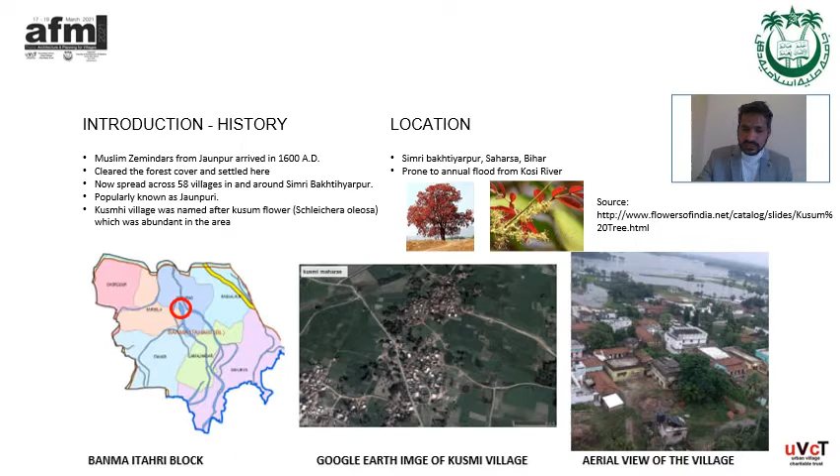This village is divided into three different neighborhoods called mohallas: Kunjada Toli, Kusmi and Charrapatti. Kusmi lies in the center and is populated by the landlords. Kunjada Toli is on the north side, populated by vegetable vendors, workers and laborers. Charrapatti is on the south side and is populated by farmers.

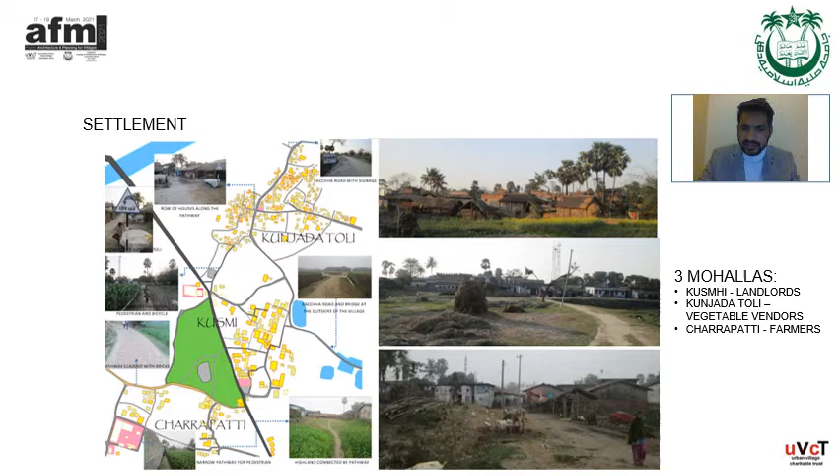In the panoramic view on the right side, you can see densely packed huts, and also palm trees, which are abundant in nature and also used as building material. In Kusmi village there are ponds overlooking the houses, and also a lot of open spaces. In Kunjada Toli, there is a mix of huts and brick-and-mortar houses.

On the main road approaching the village lies the chowk, a marketplace or center point. Here you can see a lot of shops, salons, tea points, a primary or middle school, a mosque, etc. This place is also important as it provides space for social gathering, as well as a lot of political discourse. It also provides access to public transportation.

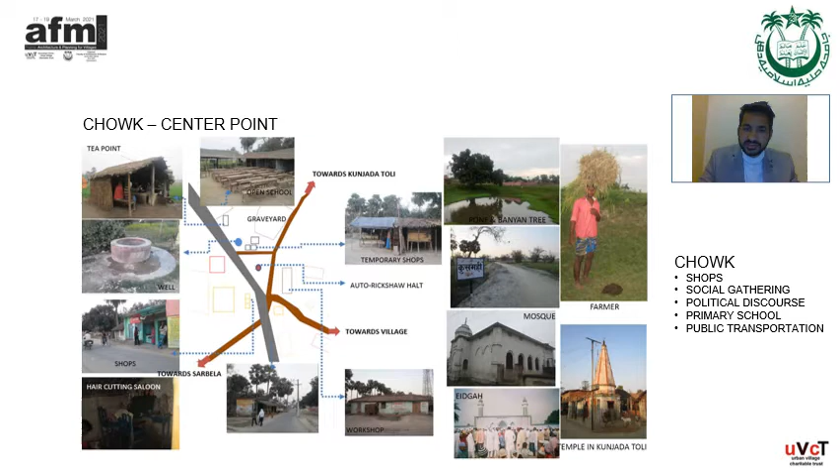Vernacular architecture of the village is inspired by the climatic conditions and local materials available here. There are three different typologies of houses: thatched huts, mud houses and courtyard houses. Thatched huts and mud houses can be seen in Charrapatti and Kunjada Toli, while courtyard houses can be seen in Kusmi.

All the spaces and activities are concentrated around the central courtyard, organized from the most public to the most private space: public, semi-public, semi-private, and finally private. Public spaces have the entrance and a darwaza, which is a guest house used especially by guests as well as male family members. Semi-public space has the courtyard, a gathering place for female members. Semi-private area is the osara and the kitchen. Osara is like a veranda, and private space has the living rooms.

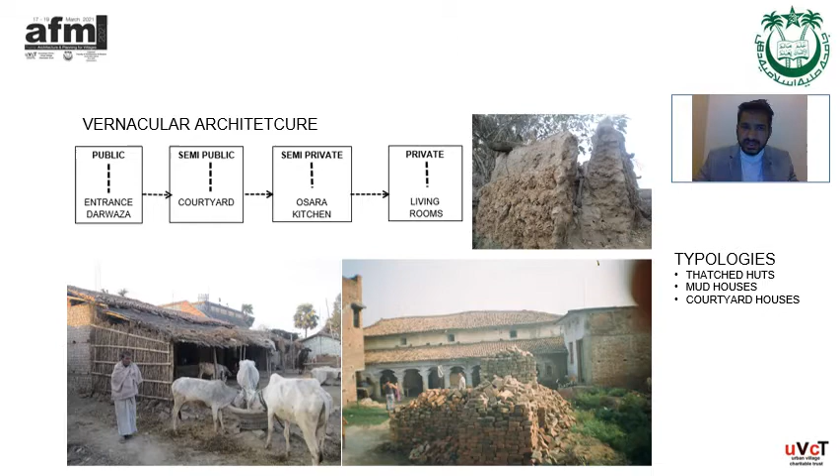Some common features of the vernacular architecture here are courtyards, verandas, high ceilings, attics and sloping roofs. The sloping roof is most common among the three mohallas or typologies because this area receives very heavy rainfall annually.

Building materials used here are mud, bamboo, timber, bricks, pot tiles, palm trunks, etc. Bricks and pot tiles were manufactured locally. Huts were made using thatched roofs and bamboo sticks. Courtyard houses were made using brick walls, plastered with surkhi lime, and mud mortar was used.

These houses had attics, and also ventilators above the veranda. In the roofing system, the palm trunk was used as a horizontal member, and bamboo and wood were used as sloping members to form the structure, with pot tiles laid over the top.

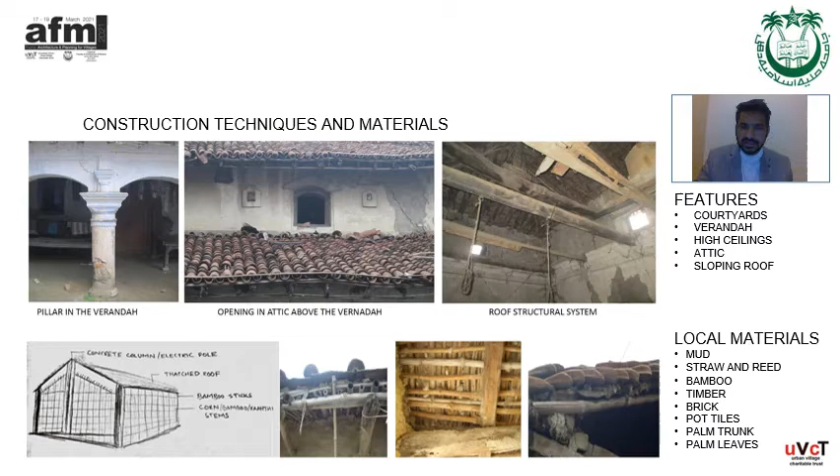Courtyard houses of Jaunpuri Muslims were planned according to the Parda system, which separates male and female spaces. Male spaces were called darwaza and female spaces were called aangan. Most household activities were done by female members in the courtyard and verandas, while activities involving male members and guests took place at the darwaza.

The houses were constructed on a platform approached by a series of steps. Inside there was a central courtyard, with verandas on all four sides, from which the living rooms were linked. On the other side were the kitchen and storage. The toilet was located away from the house for hygienic reasons.

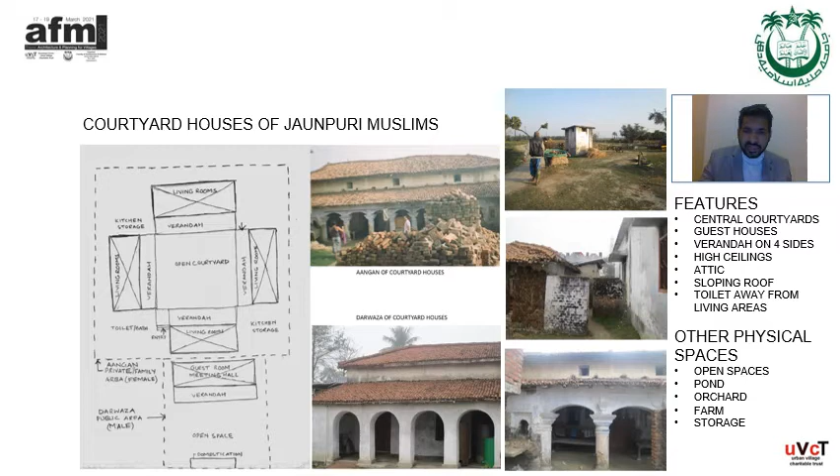In the picture you can see arches, and the roofs of the veranda and living room are at differential heights, mainly for ventilation purposes. The main purpose was privacy, and due to the local materials and building techniques, these houses were very cool and had a comfortable environment.

Houses of Kunjada Toli. Kunjada Toli have thatched huts which are mainly constructed by the family members themselves. These huts are very small in size and do not have a courtyard. For them, a street acts as a common meeting area for children to play, as well as a space for their livestock.

Some of the houses are semi-pucca houses, with a very small common courtyard shared by more than one family. Most of the houses do not have toilets, so open defecation is common here. The streets are narrow, and the whole settlement or mohalla is very high density.

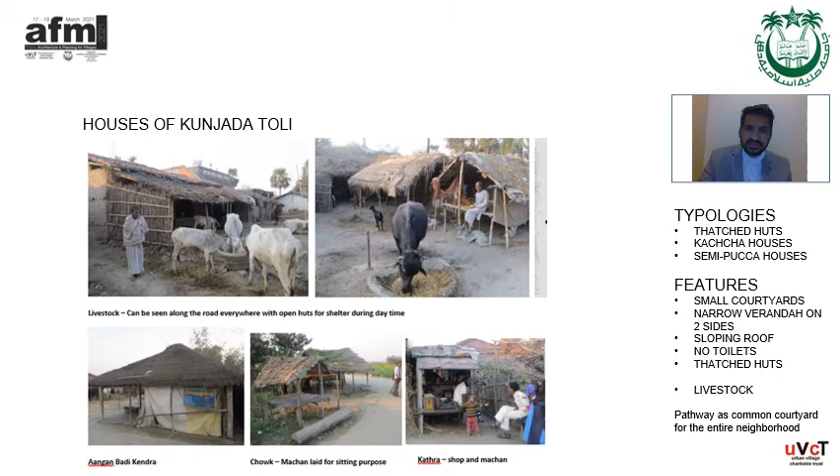Houses in Charrapatti have mixed typologies. They have mud houses, huts, as well as small courtyard houses. But at present, mud houses are not livable as they are in dilapidated conditions. Courtyard houses are small in nature, and most families share a courtyard among each other. Other houses are made of huts and are very small in size, similar to what we see in Kunjada Toli.

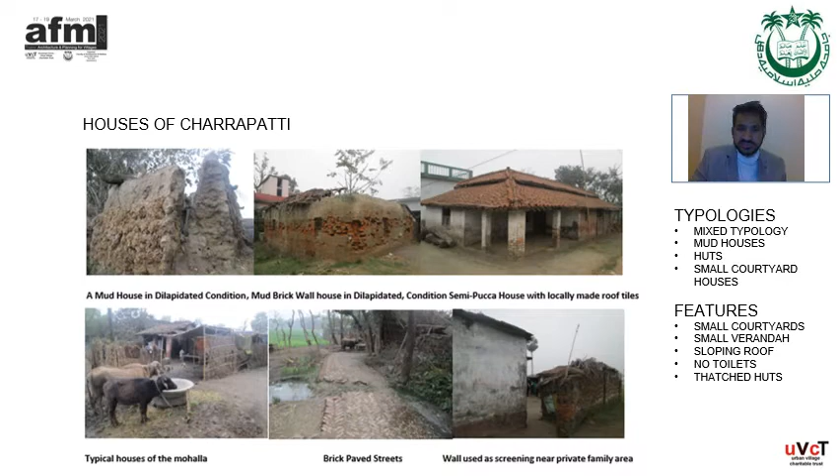Loss of vernacular architecture. Here we will talk about some events that acted as a catalyst and changed the vernacular architecture of the village. The first is the 1934 India-Nepal earthquake, which was so devastating that it destroyed some houses, and most houses developed cracks in the walls.

In 1960-70, the Panchayat election created awareness among the people, and after that the drought and the green revolution made people migrate to different parts of the country. They became financially independent and had enough money to construct their houses. In 2006, the broad gauge rail line opened the gate to different parts of the country, from where materials could be transported very easily.

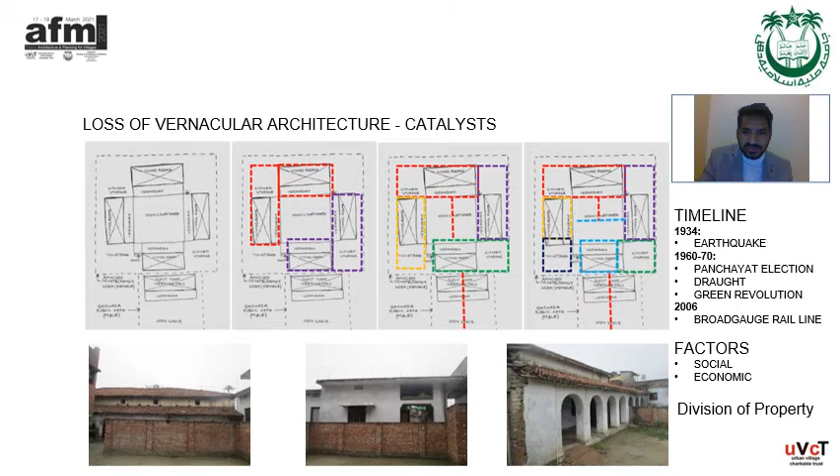Over the period of time, sloping roof tiles were removed and replaced by concrete roofs. Courtyards were removed or slowly became smaller. Most of the houses were constructed without taking the local climate and weather into consideration.

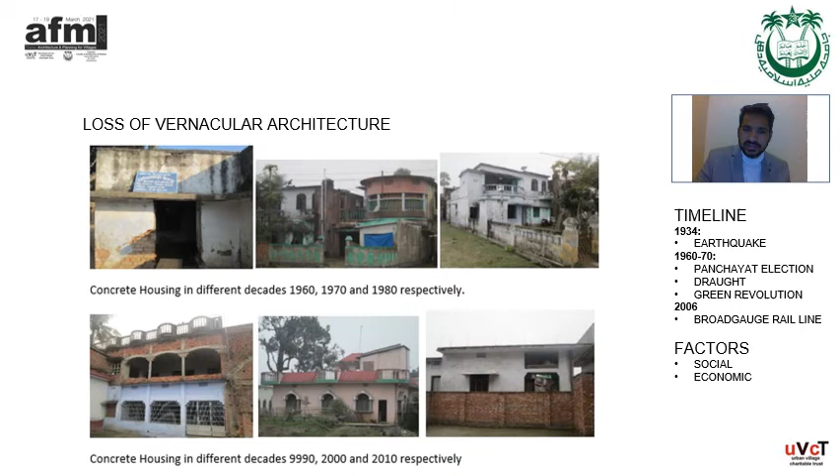To measure this loss of vernacular architecture, I conducted a survey and found out that only 29% of the houses still have vernacular architecture features, whereas the rest 71% have been replaced by concrete buildings.

In terms of mohallas, Kusmhi has only 10%, Charrapatti has 30%, and Kunjada Toli has 32%. This result also shows the link between economic condition and modern building construction. As we see, Charrapatti and Kunjada Toli do not have a good economic background, which is why they are still lagging behind in concrete and modern building construction.

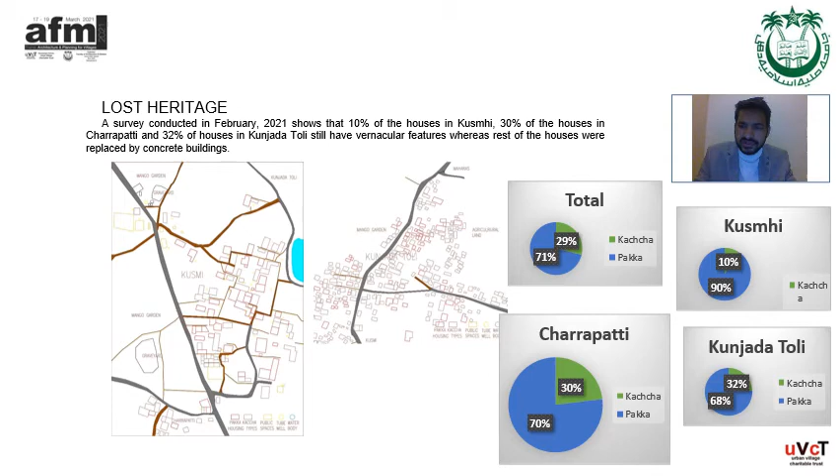Whereas in Kusmhi, the people are financially independent and have a good financial background, which is why most of the vernacular architecture houses have been replaced, and only 10% is still remaining.

To conclude this research, I would like to highlight some benefits of vernacular architecture that have been lost. These are a cool indoor environment made possible due to mud walls and use of natural materials, thermal insulation from the high thermal mass of the building, and ventilation with the help of courtyard, veranda and high ceilings.

The construction was also affordable due to local materials. Rainwater runoff was also possible due to the sloping roof. And they also promoted local art and culture, encouraging local artists who are now forced to migrate to different parts of the country.

Another factor is that a lot of people are reluctant to move out and construct new homes even when they have enough space, and there are some reasons for that: social, economic, and safety reasons. The social reason is that for ages people have lived together on the basis of caste, creed, and occupation, signifying the need of humans to live in familiar and like-minded surroundings. This was said by Gulati.

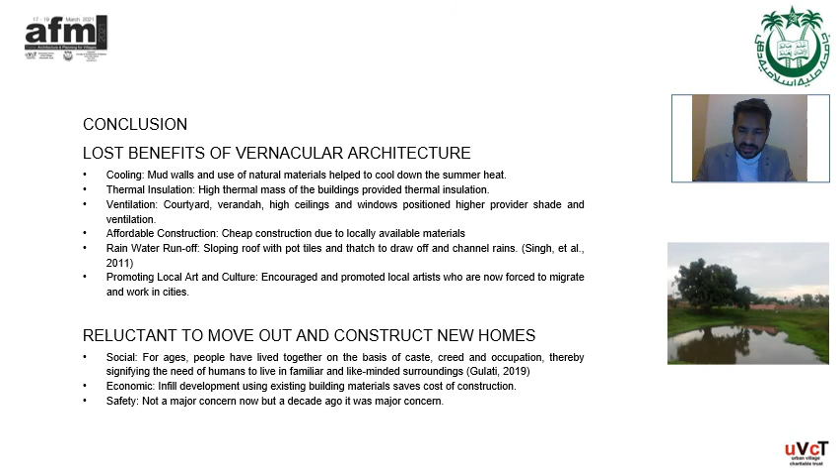The economic reason is that infill development uses existing building materials, which saves a lot of construction cost. The safety reason is not a major concern now, but in the last 10 years or before that it was a major concern.

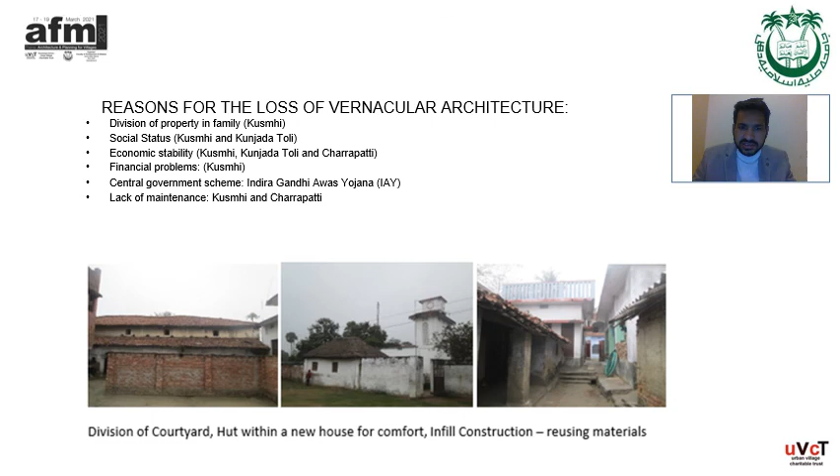Finally, I would like to highlight some reasons for the loss of vernacular architecture: division of property within families, mainly in Kusmhi Mohalla; social status in both Kusmhi and Kunjada Toli; economic stability in all three mohallas; financial problems mainly in Kusmhi; and the central government scheme Indira Gandhi Awas Yojana, which also impacted a lot because it encouraged the construction of concrete buildings, along with lack of maintenance in Kusmhi and Charrapatti. Thank you all.